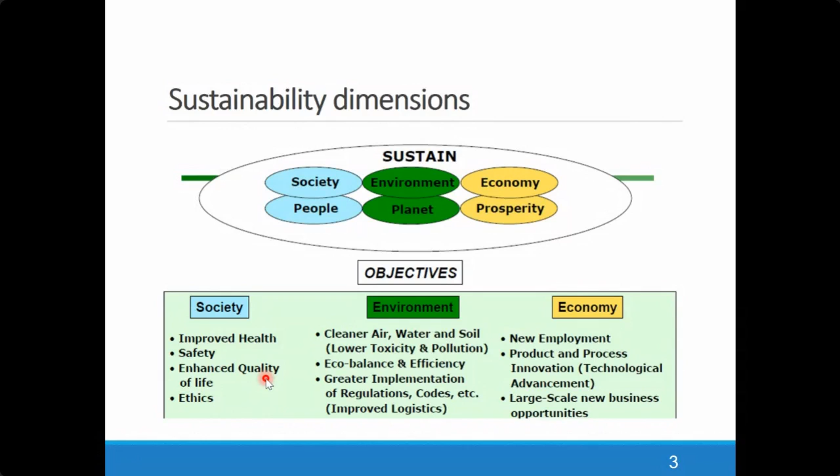Next, if you see the sustainability development, as we have seen, these triple dimensions are there in the center, like environment, economy, and society. Here the focus is on technology, how the technology has to be utilized as a part of it. So there is the prime aspect, technology, because we know pretty well in Industry 4.0 also, it is all about technological integration, like Internet of Things, cyber physical systems, additive manufacturing.

A lot of technologies need to be integrated. So in this, education and training for the workforce is very essential. And creative and innovative thinking is also very essential, because a lot of improvements we have to bring about. So in this direction, creative and innovative thinking is also very essential.

Above all, it focuses on the sustainable development. So the development has to be a sustained one as a part of it. That also needs to be focused.

If you see the various domains, this concept of sustainability and sustainable development is applicable in a variety of domains like agriculture, housing, transportation, architectural applications, constructional applications, energy-based applications, and so on. But here we will take from the domain of manufacturing, the sustainable manufacturing. So from a manufacturing background, we try to take the concept from the manufacturing perspective and explore it.

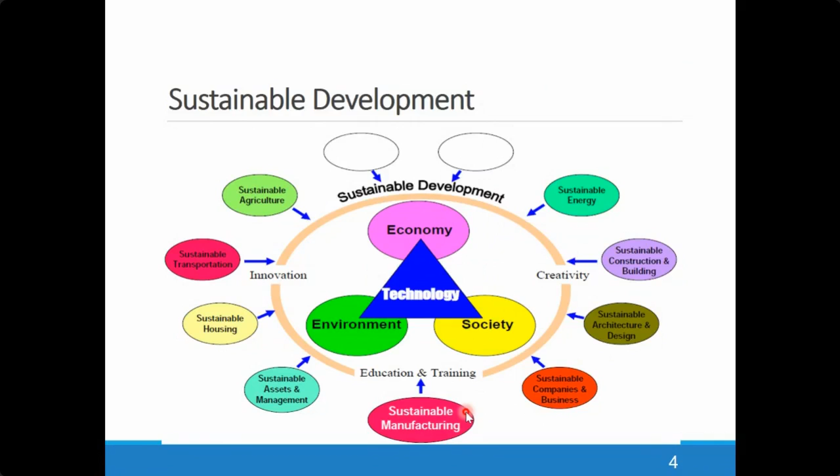So here in a nutshell, we understood the domains are increasing and the base is on technological utilization, and we need to have education and training and creative and innovative thinking. We have to promote this, because this innovation has to be brought about.

If you see some of the terms and definitions of sustainable manufacturing, it is called environmentally responsible manufacturing, because we need to have the responsibility to protect the planet. That's why it's called environmentally responsible. Then it is environmentally benign, that means environmentally inclined manufacturing. It is focused towards environmentally conscious manufacturing.

Then cleaner process, that's what we call green manufacturing. We reduce the utilization of resources, we explore reuse aspect, recycling aspect, and so on. Then again, it is called lean manufacturing, which is economically advantageous. That means how we have to produce to customer demand, how we can deal with waste minimization, how we can bring down inventory waste, how we can reduce waiting time, how we can reduce defects, and so on. So it's economically advantageous. Then energy efficient, because here we need to optimally utilize energy-based resources.

That is very essential. So energy efficiency is also very important. Next, exploring alternative sources of energy, like renewable sources and so on, because fossil fuels, the source is almost being depleted. So now we are exploring alternative sources of energy, which is more relevant. So these are nothing but the connected terms with sustainable manufacturing.

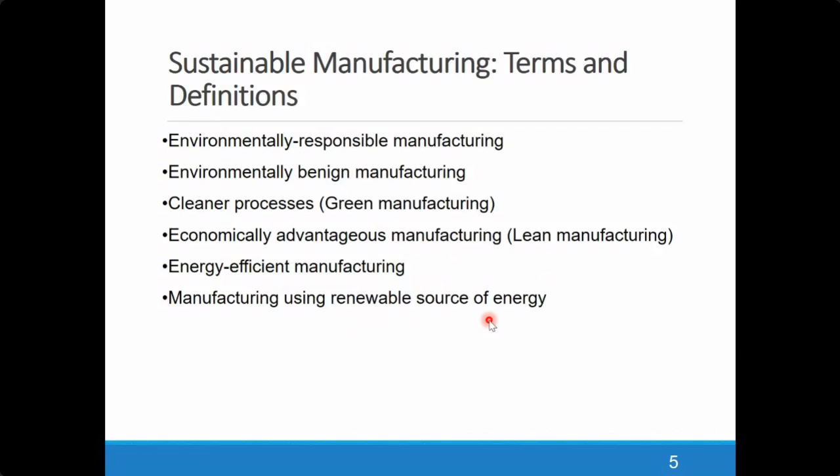Then if you see some of the basic elements of sustainable manufacturing, here we have the focus on reducing energy consumption. So always here we'll be doing an input-output analysis, because the relationship between inputs and outputs needs to be studied in order to improve system performance. Next, waste reduction, how we can bring down the waste, how we can minimize and eliminate waste.

So though lean is one of the prerequisites for a sustainable system, other forms of waste are also being taken care of, like how we can bring down the environmental waste and other aspects, how we can reduce material utilization so it is optimal, and how we can enhance product durability and lifetime.

Constantly industries are researching to enhance the durability of their products. Then how we can enhance operational safety, because now environment, health and safety are connected issues. That's why in industry context it is called EHS - environment, health and safety - how they are connected. That is also most essential.

Next, how we can reduce health hazards and enhance the health conditions of workers - that's again most essential. Next, quality improvement, because we know pretty well any advance in manufacturing systems obviously has its focus on improving manufacturing quality. How it can be focused upon.

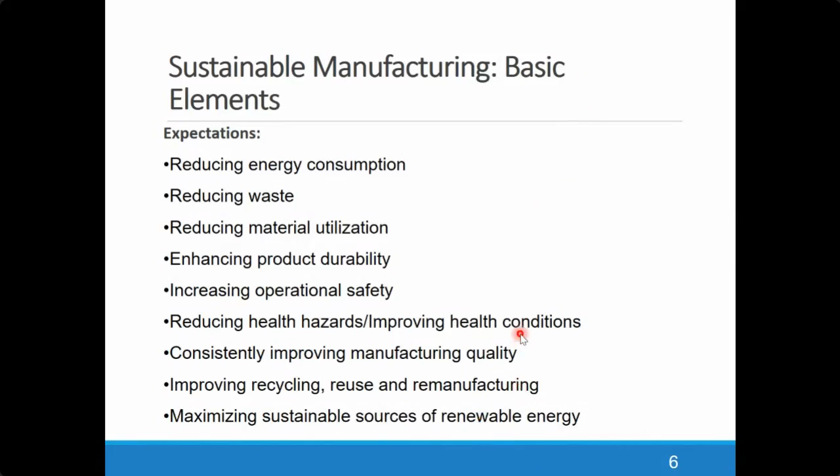Next, if we see, sustainable manufacturing is called paradigm E. That means it has its focus on ecology, protecting the planet, and has a responsibility to protect the environment, and how effectively we can utilize energy, and how it can provide economical benefits, employment opportunities, new learning opportunities, and the empowerment of people. Empowerment is very essential, because here innovation needs to happen.

Innovation will happen only when the workforce is allowed to think, when employees are allowed to think, and we have to empower them. So they have to do certain experimentation. They should have certain decision-making skills. So we have to empower them as a part of it.

Then we have to constantly educate them, because now industry's expectation is that their workforce or employees should have continuous learning potential. That is most important - whether they have that attitude for learning or not is very essential. Then excellence - how performance excellence can happen. So sustainable manufacturing incorporates all these entities which start with the alphabet E. That's why it's called paradigm E.

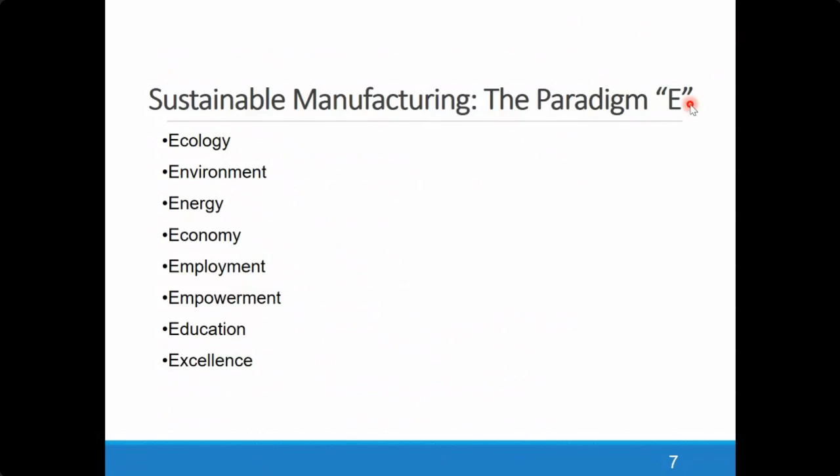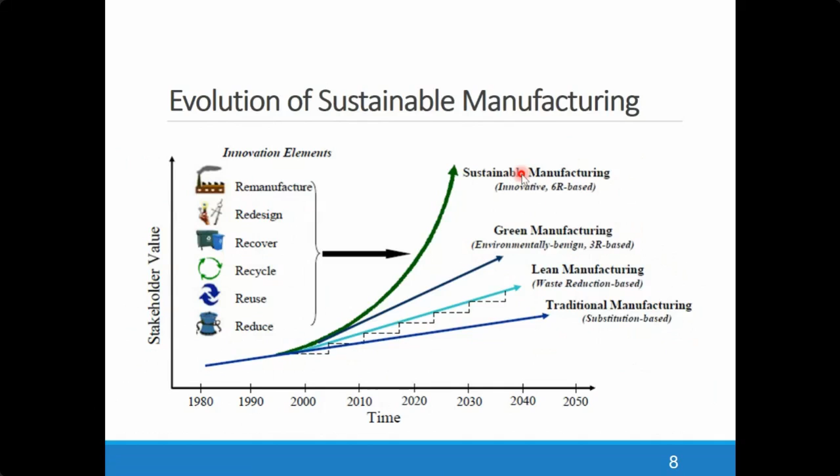So there is a difference between green and sustainable manufacturing, whereas green is 3R based, whereas sustainable is 6R based, and sustainable manufacturing is innovative, because here it is being incorporated with creative and innovative aspects as a part. This is how sustainable manufacturing has evolved over a period of time.

If we see, there are different tools for eco-efficient and sustainable manufacturing, starting from design for environment, eco-efficiency analysis, and life cycle assessment, which is one of the powerful tools. We'll be discussing this tool, which is used to find the environmental impacts of products and processes.

Then how procurement could be done, incorporated with sustainability aspects. Then life cycle costing, we shall have some discussion in this aspect. Then environmental impact assessment. Likewise, there are different tools. But from a product design and manufacturing perspective, we are very much concerned about design for environment, life cycle assessment, life cycle costing. These kinds of tools are very relevant from a manufacturing perspective, especially from a product design and manufacturing viewpoint.

Are there any queries till this stage? Always you can post in the chat box. Dr. Dinakaran, are there any queries as till this stage being posted in the chat box? Because I could not see the chat box. Dr. Dinakaran, are there any questions being posted in the chat box? Sir, please go ahead, sir. They will post their question at last. Okay, at the last. You can go on, sir. Fine.

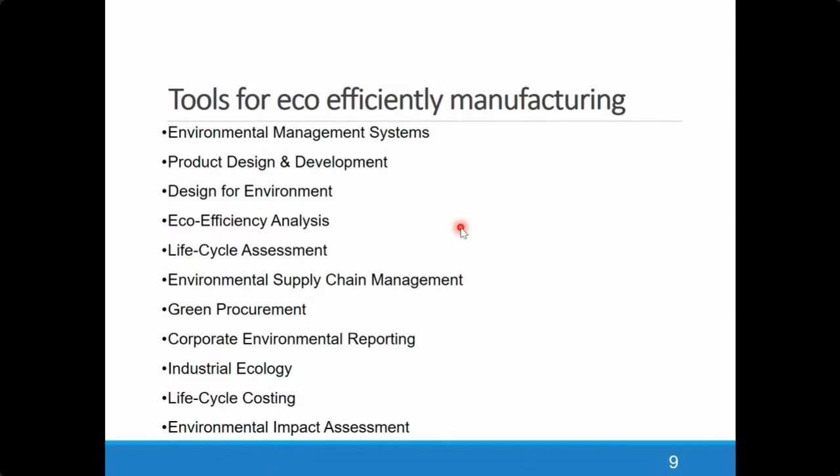Okay, now let us see, as I told, about the scope of design for environment and product design and development from an environmental aspect.

Now let us see the model for sustainable product development, wherein we have the traditional product development, which starts with customer requirements, and we move on with the design goals or design objectives. We design the products, manufacture, it's put into use, and finally it's disposed.

But when we take on the sustainability focus, we try to take into account the customer requirements and the environmental aspects, and we try to do a kind of quality function deployment based analysis to find out the kind of trade-offs or relationship between the customer requirements and the environmental aspects.

Then, after doing this kind of analysis of interrelationships and trade-offs, we try to go for a life cycle assessment based analysis and do a life cycle costing to find out which components have the potential for environmental impact reduction.

Because we can't say that in a product assembly all components will have the same kind of potential for environmental impact reduction. So definitely there will be a differential scope among the products for environmental impact minimization. So we need to explore the components which have potential for environmental impact minimization.

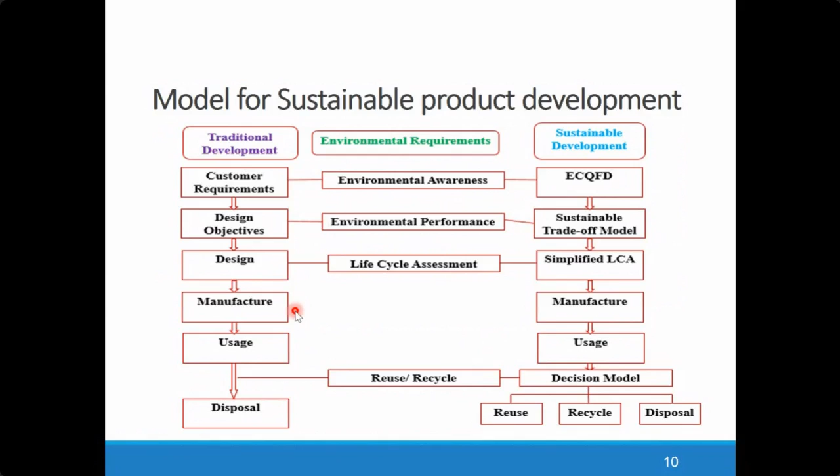Okay, so with this we shall proceed with the next tool, which is called life cycle assessment, one of the powerful tools used to find out the environmental impacts associated with products and processes. It is also called life cycle analysis, eco-balance analysis, or cradle to grave analysis.

So the term cradle means starting from material extraction. Grave means the product which is being disposed back to the environment. So here we'll be able to assess the environmental impacts associated with all stages of a product's life cycle, starting from material extraction.

Then we process the materials, manufacture, distribute, put into use, then repair, maintain, and dispose of the products. Likewise, we have different phases, and here the LCA has to be done based on the ISO standard as a part of it.

Here it facilitates the comparison of products and processes, and here we will take the life cycle perspective as a part of it. So that is more essential, and there will be different boundary systems as well as a part of it.

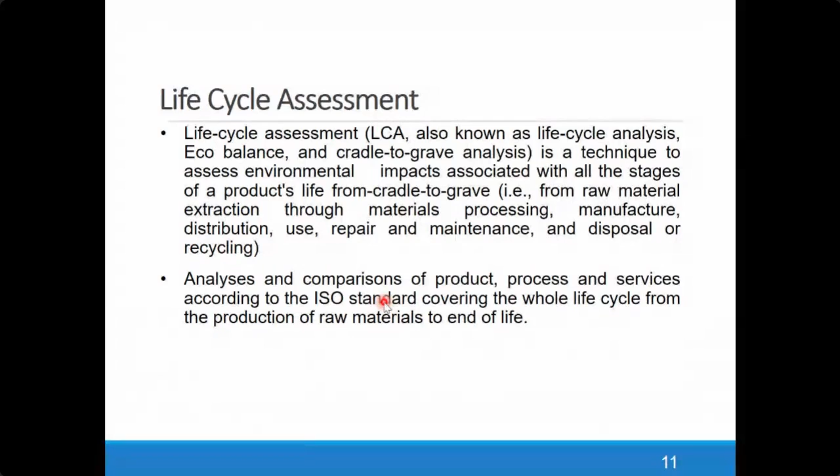For example, within a factory, the raw material has arrived and the product is being manufactured. Within this boundary we are doing what's called a gate-to-gate system, where starting from materials extraction up to the product being manufactured, it is called a cradle to gate cycle. So we have different boundary conditions.

In life cycle assessment, we should have a holistic approach for products, process, and activities. Here we start from acquiring materials, we manufacture them, we use and explore the end of life aspect, and here we'll be doing the reuse and recycling aspect, studying it as part of it. So we take a holistic aspect of products, process, and activities, giving us a holistic picture of the life cycle assessment.

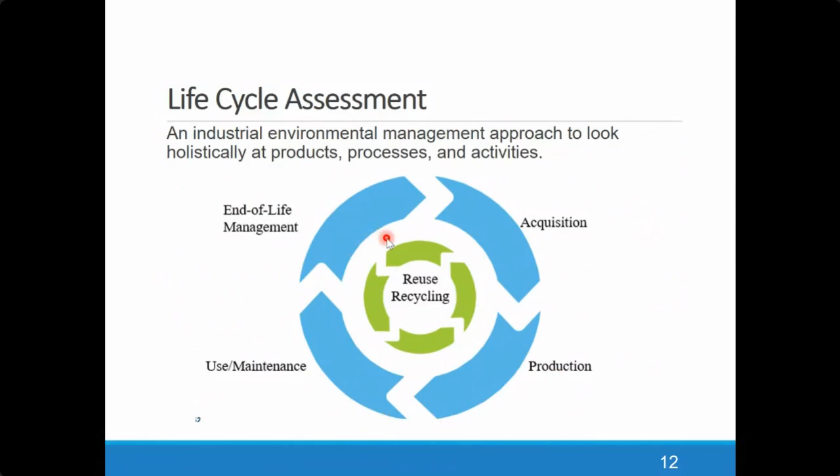There are different standards we may have to follow for doing LCA. We all know the ISO 14000 series is meant for the environment. 14040 contains the principles and framework for doing LCA, and 14044 contains the requirements and guidelines for doing LCA. This is a standard procedure to find the environmental impacts.

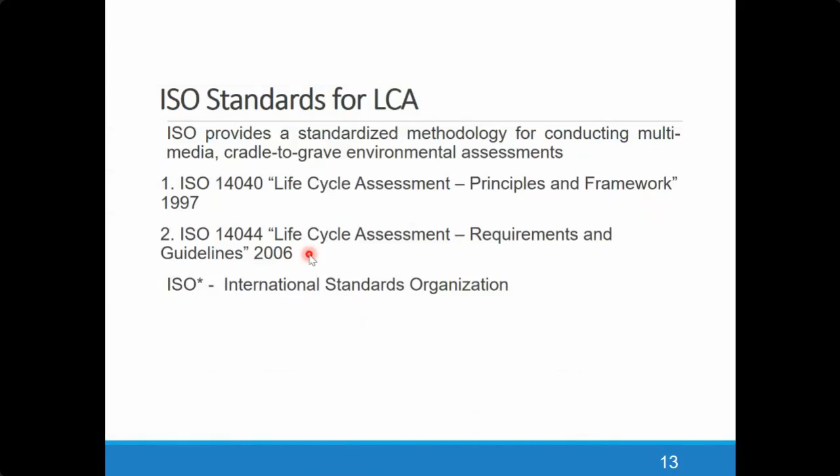We have to refer these standards because, for example, automotive component industries manufacture similar products like crankshafts or camshafts. They do LCA and want to compare their environmental impacts - what is the carbon-based emission during the manufacture phase - so they'll be able to benchmark as part of it. So there is significance in adopting standards.

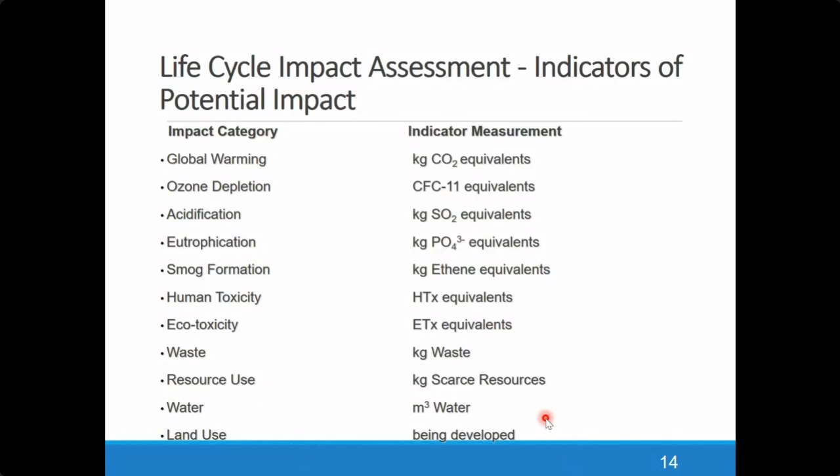There are different environmental indicators as part of it. Any LCA analysis can find about 16 impacts, but from a product design and manufacturing viewpoint, we are very much concerned about carbon-based emissions, sulfur-based emissions, phosphor-based emissions, and energy-based emissions. So these four impacts are very significant, and those indicators we are very much concerned about.

In goal and scope definition, we should spell out the objectives of doing LCA. Why are we doing LCA? Are we going to benchmark the products? Are we going to benchmark the process? Or is the customer asking? Or is a regulatory agency asking? We should be very clear about the objective of doing LCA.

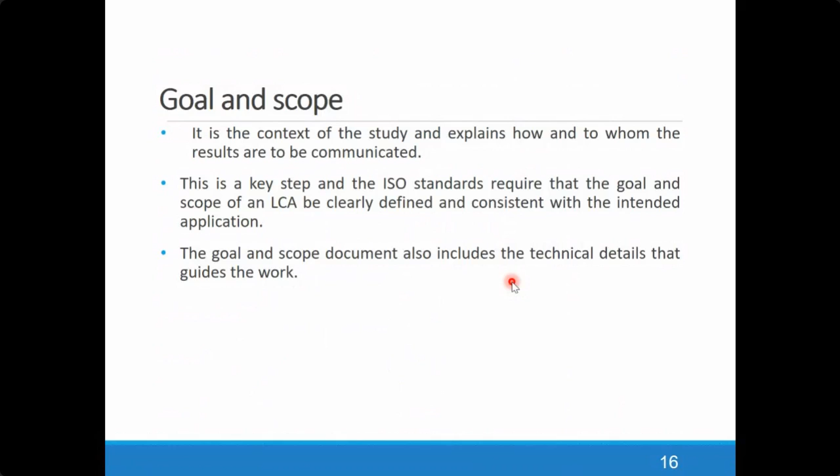We should discuss the scope, that means the boundary. Are we going to do a cradle to gate analysis or a gate to gate system? The boundaries need to be spelled out very clearly as part of it.

We should be familiar about the product function. This is nothing but the intended purpose of the product for which we do the environmental impact analysis. The product function needs to be defined very clearly, for which we take inputs from the functional model of a product, through which we understand the intended purpose of the product for which we perform the analysis.

When we are doing benchmarking, we have to compare only similar systems. Let's take a common example of a coffee grinder - the purpose is to grind coffee pellets. So we need to compare the LCA results of a coffee grinder with another coffee grinder. The systems adopted for comparison should be similar.

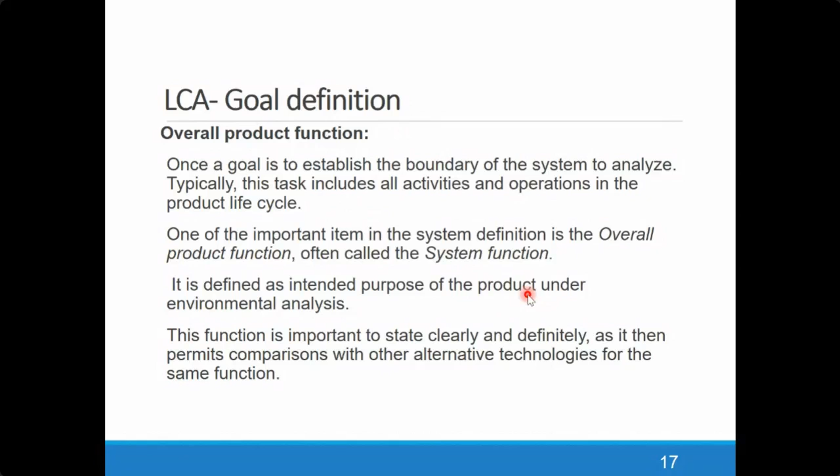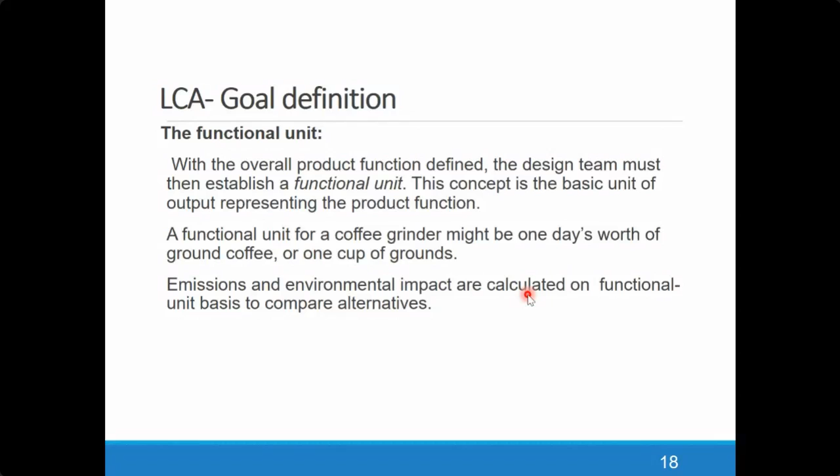A functional unit is nothing but, per hour, how much coffee pellets we are grinding, or per day, how much coffee pellets we are grinding. The functional unit is very important because all the emission and environmental impact data will be calculated based on the functional unit to compare alternatives. That is very much essential, so we should be very clear about the functional unit.

Then the next phase is the inventory analysis phase. Here we'll be creating the inventory flows from the system and to the system. What is the meaning of inventory? Traditionally, inventory is the stock of goods. But here, it means how much material is being consumed, how much energy is being consumed - that is the inventory data. For a process: what is the primary material consumption, the secondary material consumption, how much energy is fed to the process, how much is wasted, how much is transformed? We should have a clear understanding about the relationship between inputs and outputs - that is very essential.

So we try to create the inventory flows from nature - raw materials and energy being fed to the system. And from the system, the product, apart from the emissions and pollutants which are sent to nature. These inflows and outflows we have to clearly define, and we should create a flow diagram to understand the complete inventory flows.

We may have to do process modeling. Traditionally, we take a two-dimensional process model with inputs and outputs. But here we may have to do a three-dimensional process modeling, counting inputs, outputs, and impacts. That is very essential as part of inventory analysis.

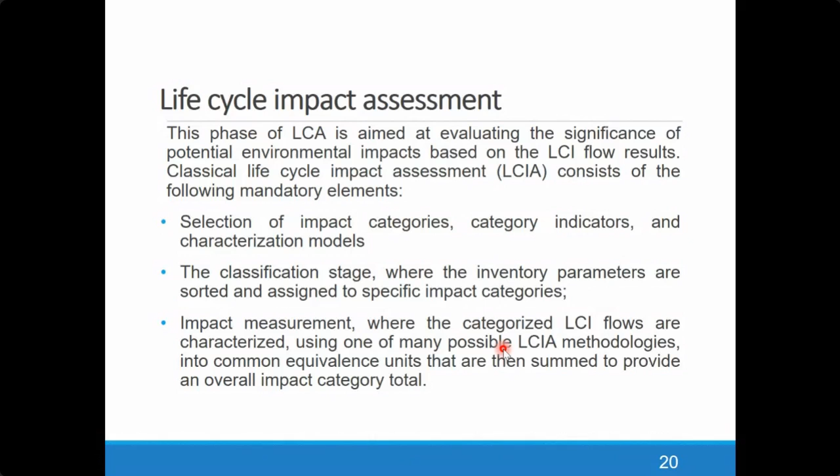This is about the impact assessment. Here we'll be able to find out the impacts by correlating the inventory data with the impacts, for which there are specific methodologies. In the Indian scenario, we follow the eco-indicator approach. From the European context, they follow the CML method. Impact assessment methods vary keeping in mind geographical conditions and other aspects. So we'll be following the eco-indicator method for impact assessment.

Next, the last phase is interpretation. Here we'll be finding out the conclusions and deriving inferences and recommendations from the study. We may do a completeness analysis, a sensitivity analysis, and derive the conclusions and inferences from the study.

How to reduce the environmental impacts? What are all the ways? Say we found the carbon-based emission is higher - how can it be brought down? Are we going to take some alternative material, or change some process, switching over to another process? We will do complete research and try to find out all the ways we can bring down the environmental impacts. That's what we'll be doing in the interpretation.

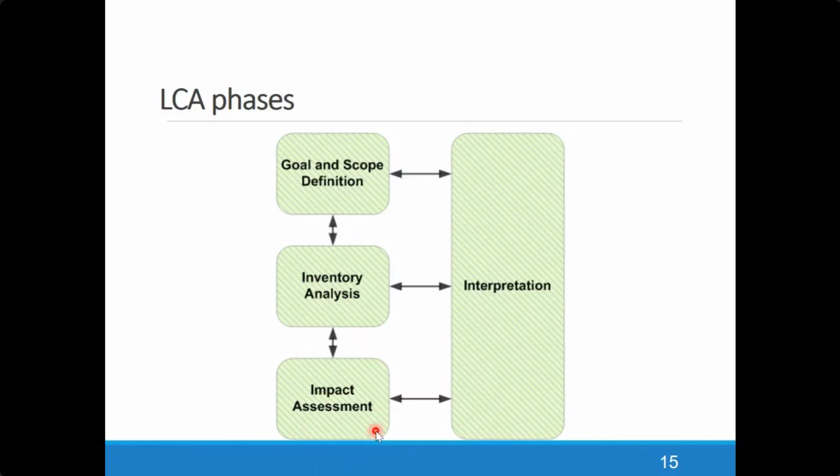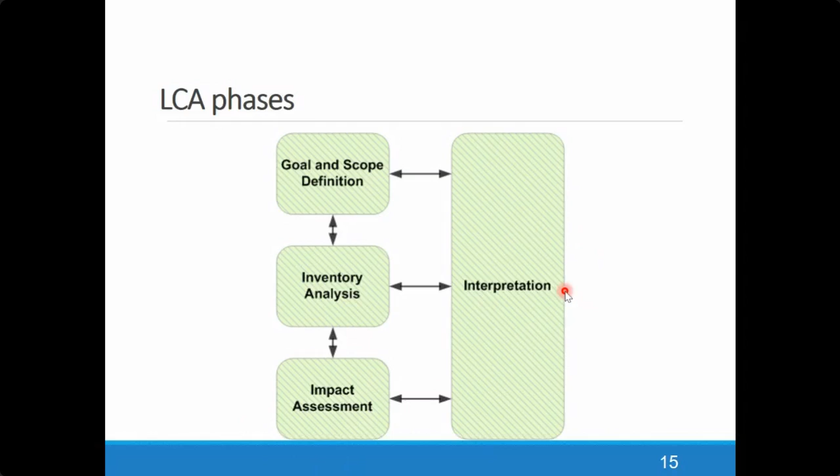So now we discussed the 4 phases. One is goal and scope definition - we understood the objective, the scope to be defined, the product function and the functional unit to be defined. Then we go ahead with the inventory analysis - we clearly find out the inventory data, create the inflows and outflows to the system, and do a complete flow analysis. Then we go ahead with the impact assessment, concerned about finding the impact categories and impact indicators relevant to us. Then we go ahead with the interpretation. This is about the 4 phases of doing an LCA.

And there are different software modules for performing the life cycle assessment. I'll be showing you a module through which we can perform the LCA.

If we see the benefits, we can find out the significant environmental impacts - which environmental impacts are vital - and explore the opportunities for minimizing them. We can promote the demand for products with lower environmental impact - now they say it's a green product, with eco-labeling and other concepts. So it promotes the demand for such products and compliance with regulations, and tries to integrate environmental management into decision making. These are all the various benefits of doing an LCA.

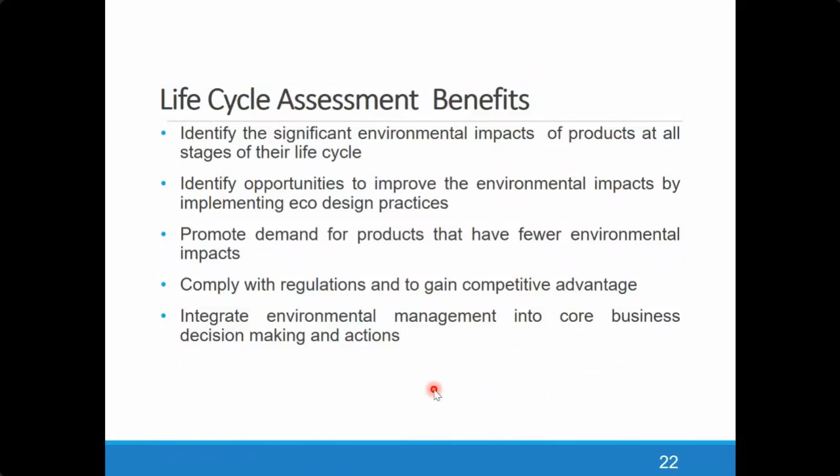So this is about the life cycle assessment. We will discuss the LCA module subsequently. One of the modules we will discuss today as part of it will give you some insight into how we do it. Now we discuss the theory, and we can see an illustration of how we do the LCA and how we derive the inferences from it.

Before that, let us go through the life cycle costing approach, which is also very essential from a product design perspective for sustainable manufacturing. In life cycle costing, it's a kind of numerical analysis we do, wherein we try to calculate the product gain of a product, which is the difference between the product value and the life cycle cost of the product.

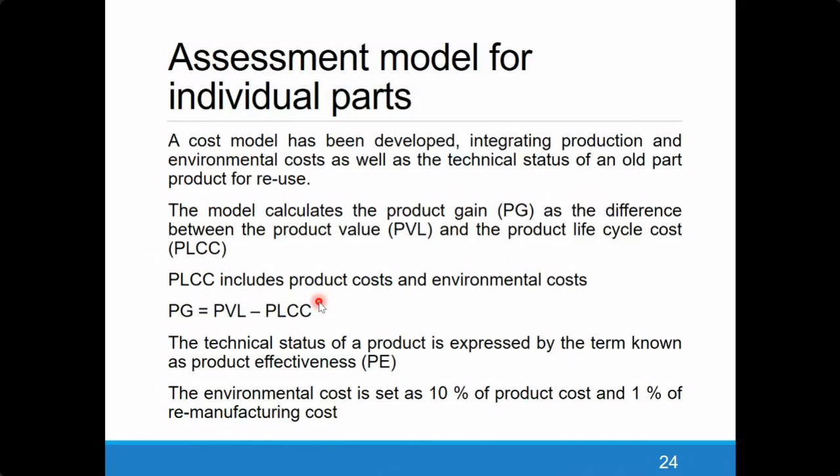Let us see an illustration to understand this. It is a kind of assessment model wherein we can see 2 scenarios: one is manufacturing a new component, and another is reverse manufacturing an old component. The product cost of different components is known to us. The environmental cost is normally 10% of product cost for forward manufacturing, as per the guidelines given in the literature.

And the life cycle cost is the sum of the product cost and environmental cost. Then we know the market price of individual components. The product effectiveness is a binary value: it takes 1 if it has scope for reduction of environmental impact, 0 otherwise. Product value is the product of market price and product effectiveness. Then we calculate the product gain, which is the difference between the product value and the product life cycle cost.

Next is reverse manufacturing an old component, wherein we have the procurement cost, where once the product lifetime is over, we have to procure it from the customer. This incurs some cost, called procurement cost, and the remanufacturing cost. We need to do certain reprocessing activities to bring the product to its extended life. So we incur certain remanufacturing cost. The environmental cost is normally 1% of remanufacturing cost as per the guidelines given in the literature, and the summation of these 3 is the life cycle cost.

Market price, product effectiveness, and product value calculation remain the same; the procedure remains the same. The product gain is the difference between the product value and the life cycle cost. So here we'll have 2 product gains: one for manufacturing a new component, another for reverse manufacturing the old component. We need to calculate delta product gain, delta PG, which is the difference between the product gain for reverse manufacturing the old component and that of the new component. That difference is the net product gain, delta PG.

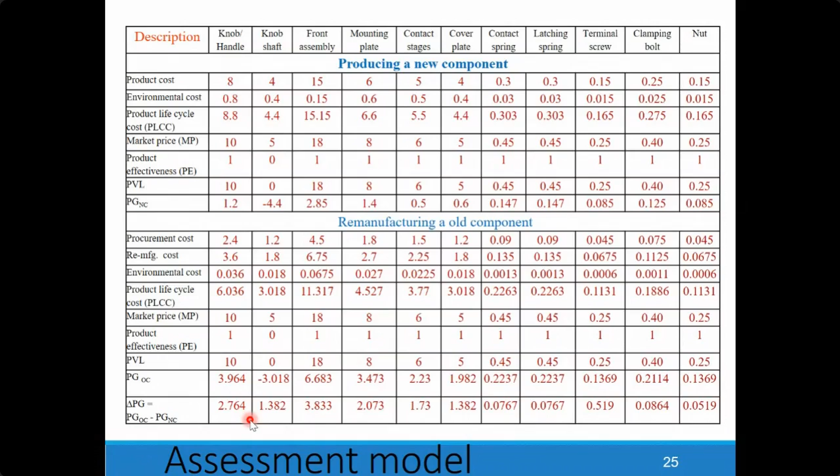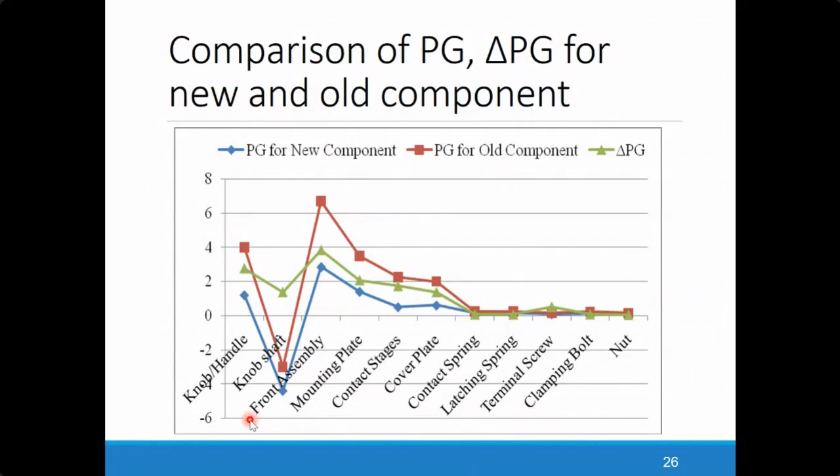That is, from different components in the product assembly, we can find out which component has potential for environmental impact minimization. So we shall focus on those components because they are very good candidates for bringing down the environmental impact. This kind of differentiation is needed because we can't say that all components in the product assembly will have similar potential for reverse design and reverse manufacturing. It's not so.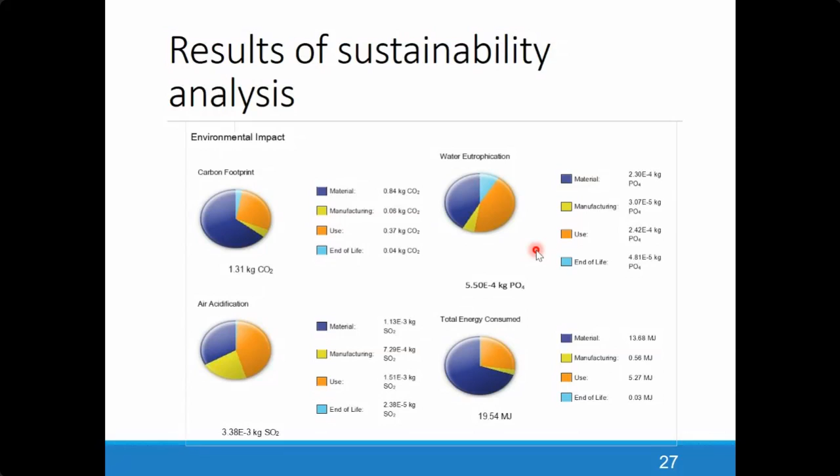Next, I'll tell you about a sustainability analysis module, with subsequent details. So here we have identified the components for environmental impact minimization. Then we may have to test what is the reduction in the environmental impact, for which we will go ahead with the sustainability analysis module. Through this module, we'll find out the environmental impacts across the life cycle perspective, which I will discuss subsequently.

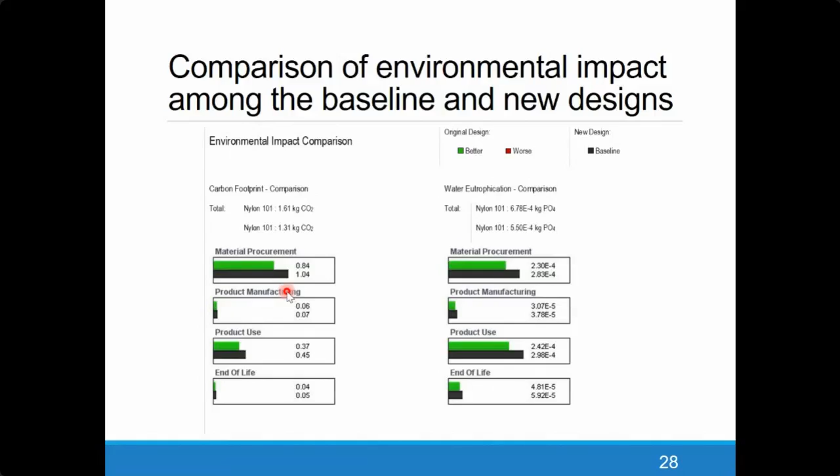Okay, so anyway, I'll be discussing the sustainability analysis module subsequently along with the LCA module. Here we understood that the components from life cycle costing will indicate which components have good potential for environmental impact minimization.

With this, we shall proceed with a discussion on the 3 R's and 6 R's of sustainable manufacturing. As I told in green manufacturing, the focus is on 3 R's: reduction of usage of resources, reusing, and recyclability. The 6 R's add recovery, redesign, and remanufacturing. So a sustainable product is having the focus on 6 R's.

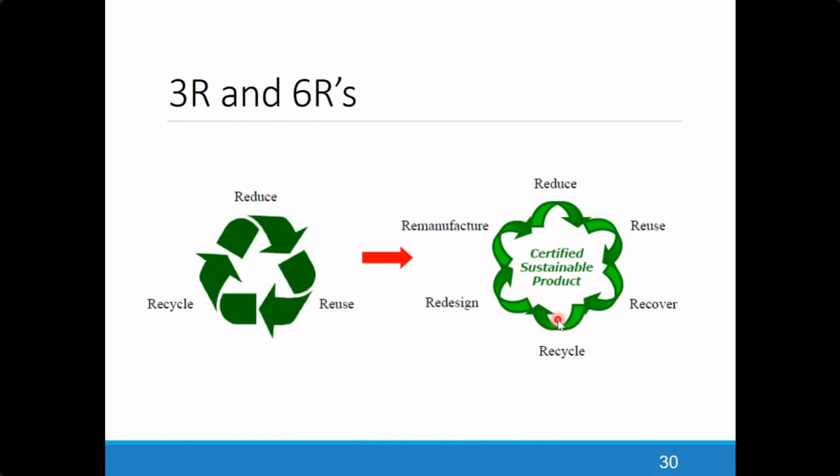After the useful lifetime, we have good potential for recovering the product and subsequently recycling, redesigning, and remanufacturing. Likewise, we can explore the 6 R's as part of it. So these 3 R's and 6 R's are very, very essential.

From this analysis, we can find out the components having good scope for reuse and recycling. Even in the additive manufacturing context, I pointed out how we are recycling, how the scope for recyclability of powders is being brought, and how dealing with the support structures is also being ensured.

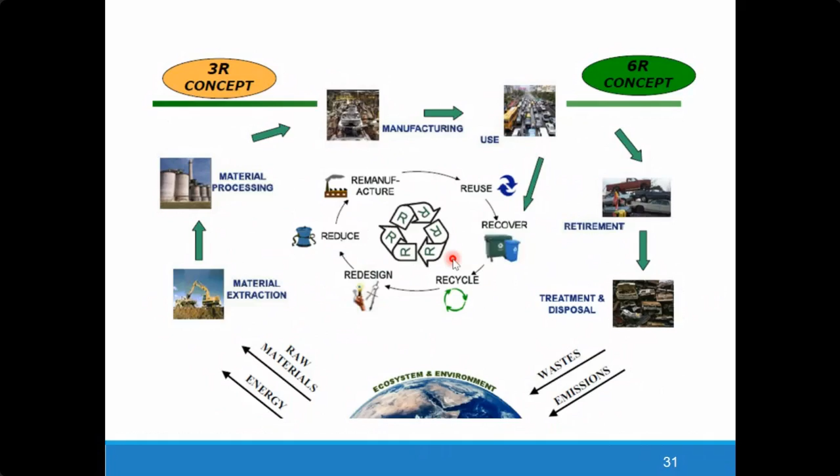It's being put into use, and post-use we'll be exploring recovery, redesign, and remanufacturing - the 3 other R's associated with sustainability. If the recovered material quality and yield is good, we take it ahead; otherwise it becomes landfill. The idea is that the landfill should be minimal, so we have to explore the reuse and recyclability of the materials.

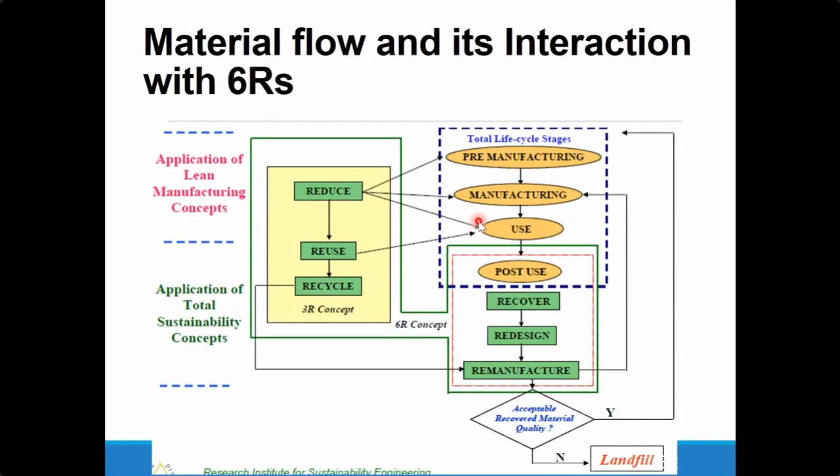So now we had a discussion on the 3 R's and 6 R's of sustainable manufacturing. Next, we will go ahead with the energy efficiency analysis of the manufacturing process, how it has to be done.

For example, as I told, we may have to do a kind of process modeling, which is very, very essential. Any typical manufacturing process model will have inputs in terms of material related input, product geometry information, and so on. On the output side, we have the product, waste and emissions, along with certain energy inputs, waste heat and other aspects.

The idea is that the relationship between inputs and outputs is very essential, and we may have to optimally utilize the input resources, thereby the output will be the desirable product, with waste and emissions minimized. But from a sustainability aspect, the energy models need to be 3-dimensional, where we have the inputs, outputs, and corresponding impacts. This relationship needs to be studied and analyzed, for which we may have different levels of energy efficiency assessment.

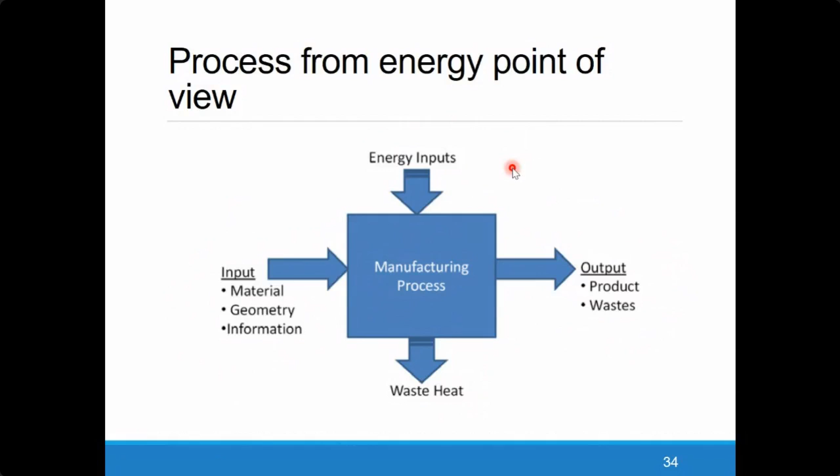First, we go ahead with the process level, where we study the energy related aspects and energy losses. Then we move to the machine level, which has several processes. From machine level, we move to the line level, wherein we have different machineries and equipment. Then from line level, we move to the factory level, wherein we have different product lines. So these are the different levels of energy efficiency assessment: process, machine, line, and factory level.

Now as I told, we'll be discussing about 2 modules. One is a product-based life cycle analysis, and another one is a process-based life cycle assessment module. We'll also discuss the sustainability analysis module, wherein we'll be finding about the 4 impact parameters.

From product design and manufacturing, we are concerned about the carbon emissions, which is called carbon footprint. Second is the phosphor based emissions, which is called the eutrophication indicator. Another one is the sulfur based emission, called the acidification indicator. And the last one is the energy being consumed, which is the energy related impact. So these 4 impact indicators will be of interest.

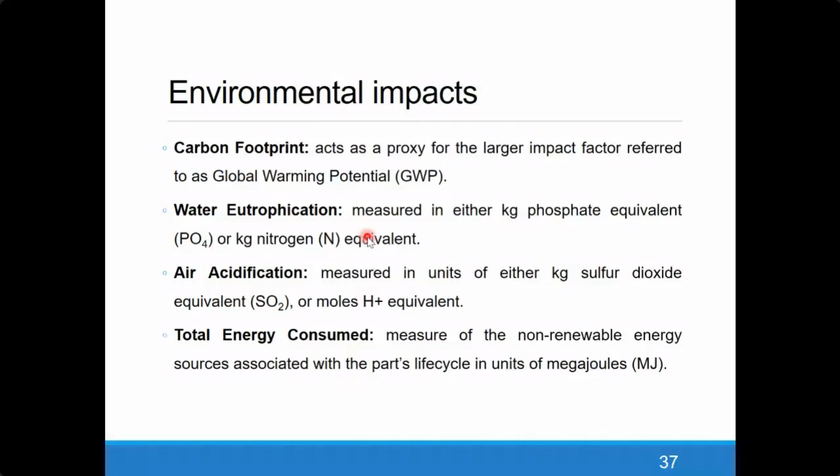This kind of sustainability analysis module is available with certain CAD based tools like SolidWorks and other modules, wherein once we develop a CAD model, we'll be able to specify the material, the manufacturing process, and spell out the manufacturer location and user location, because the impact assessment methods may vary as a part of it.

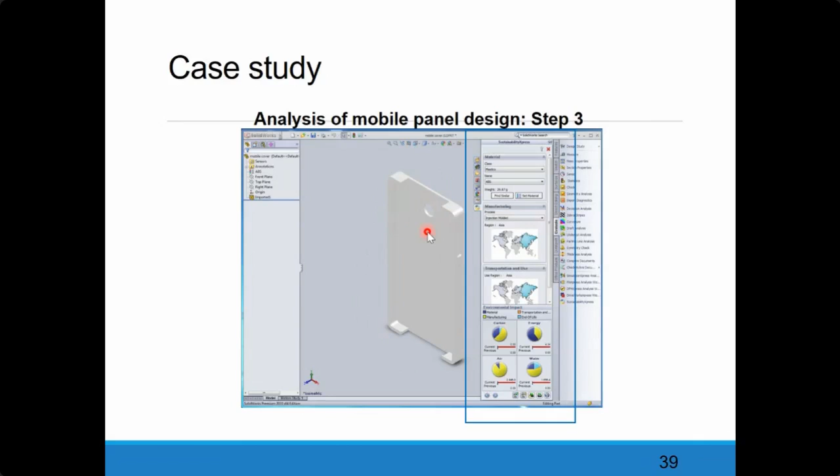Once we make the CAD data available, which includes the complete geometrical information of the product, and once we specify the material, manufacturing process, manufacturer, and user location, then the module will calculate the environmental impacts in 4 categories, like carbon based, phosphor based, nitrous based, and energy based impacts.

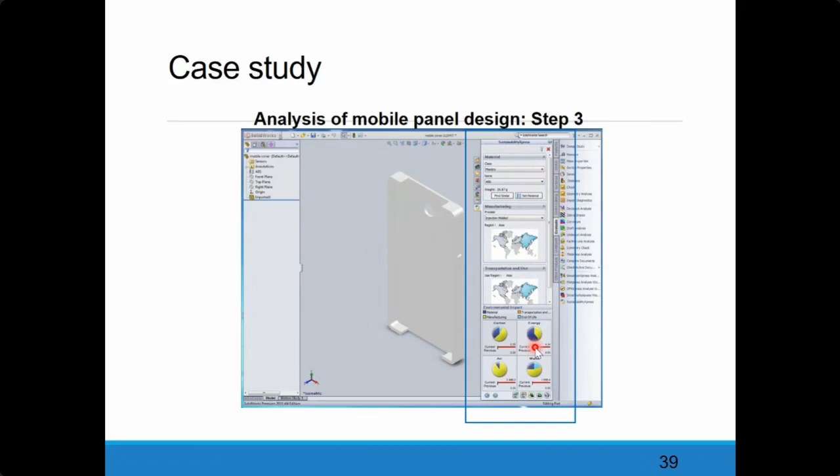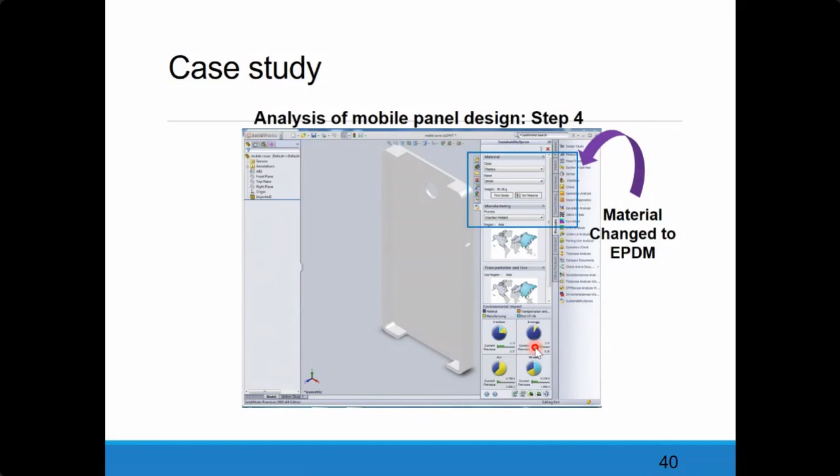Here we can explore what kind of effect changing the material can bring, or changing the design, or changing the process. All these iterations are possible as a part of it.

So at the elementary level, it will calculate the 4 types of impacts across their life cycle aspect, like materials, manufacturing, use, and end of life, and so on. Then we'll be able to benchmark the designs.

So this kind of product-based life cycle analysis will help us as a part of it. It even has very good relevance in the context of additive manufacturing, where we are exploring, even maybe in polymer-based printing, different materials which may have lesser environmental impact, and so on.

Or I want to benchmark maybe an existing process like injection molding with a 3D printing process based on FDM. I need to compare their environmental impacts, so it has good relevance even in additive manufacturing context, and we need certain studies as well.

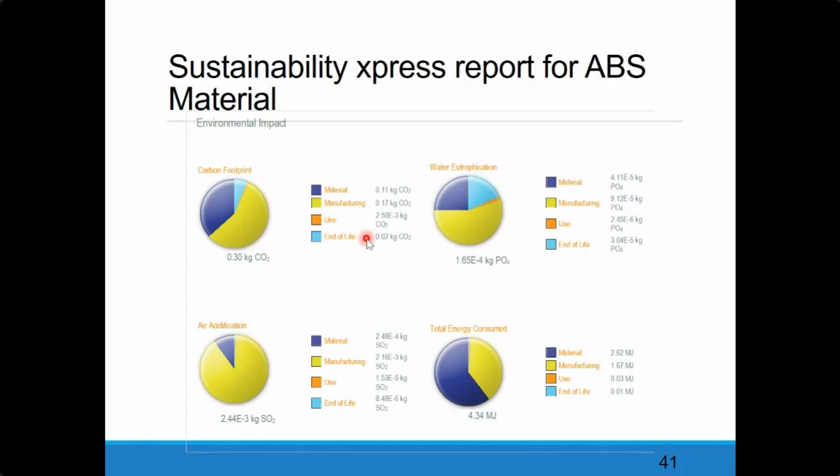The second module which I want to show you is a kind of LCA module, which is called the SIMAPRO module. This module is to facilitate the data collection, analysis, and it helps the monitoring of the sustainability performance.

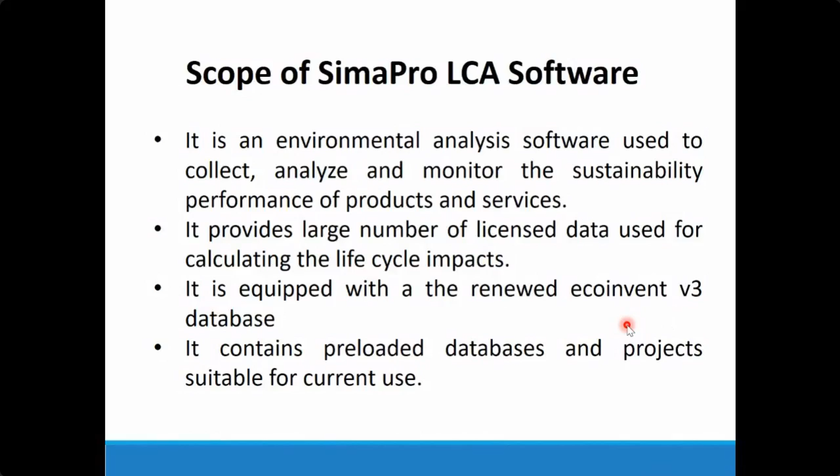It has been incorporated with the EcoInvent database, and this database will have all data associated with the materials and the process. This is the kind of interface we could see in the SIMAPRO module.

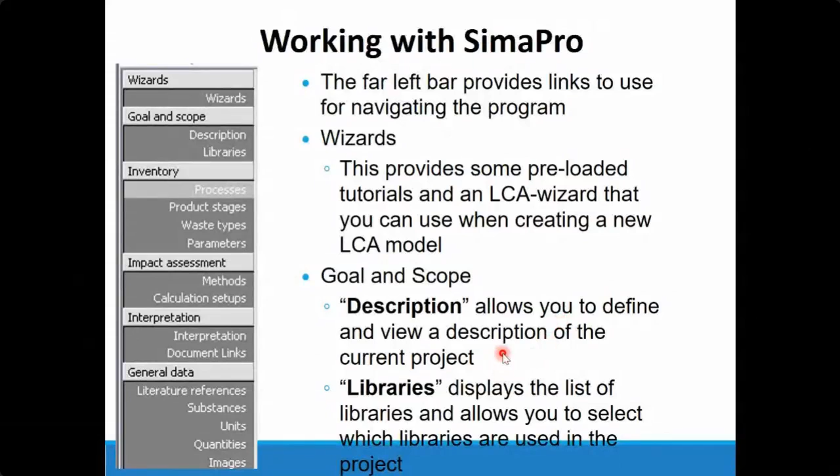It is as per the 4 phases of the life cycle assessment, like goal and scope definition, inventory analysis, impact assessment, and interpretation. It has predefined wizards, and here we'll be able to provide a description of the project, what the project is about, and it has certain predefined libraries and so on.

Wherein it has different materials and other aspects, and then the process tab will help you specify the process or the selective process involved, and the product stages where we can define the different life cycle phases and so on. It also has provision for defining different types of waste, and here we'll be able to spell out the various parameters being considered in the LCA.

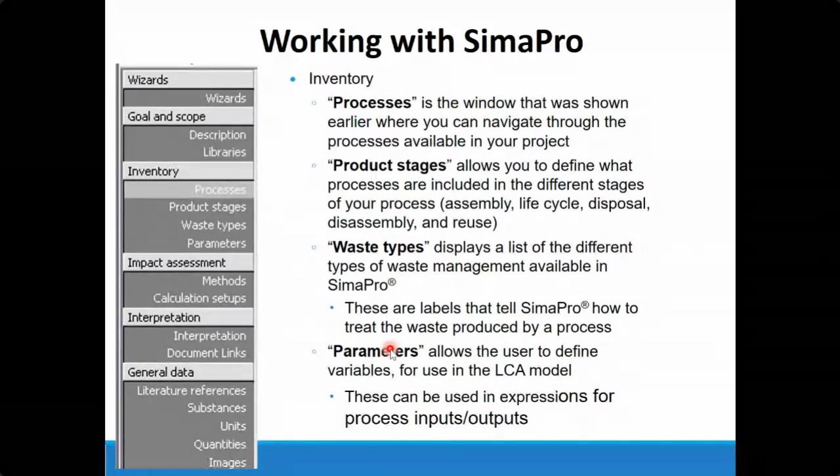Here the module again does a kind of relationship analysis between the inputs and outputs, and we may have to spell out the environmental impact assessment method.

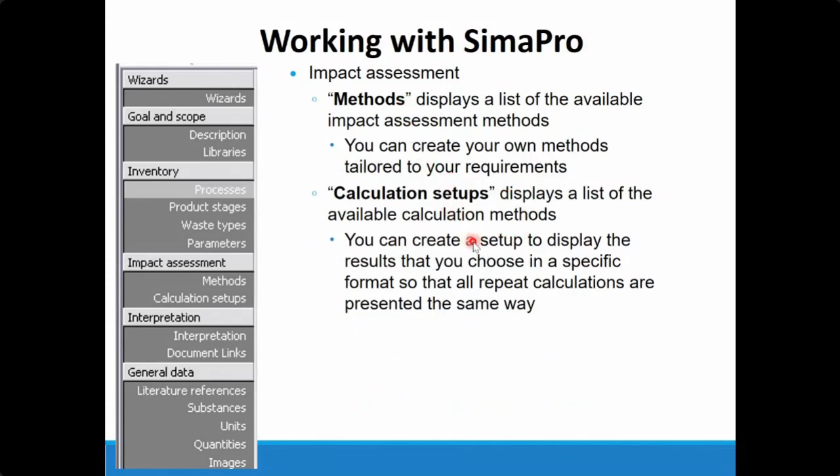As I told, we'll be using like a CML or eco indicator method and so on, and then we may have to go ahead with the computation, and it will derive the computations, and further we may have to infer, and the interpretation needs to be derived.

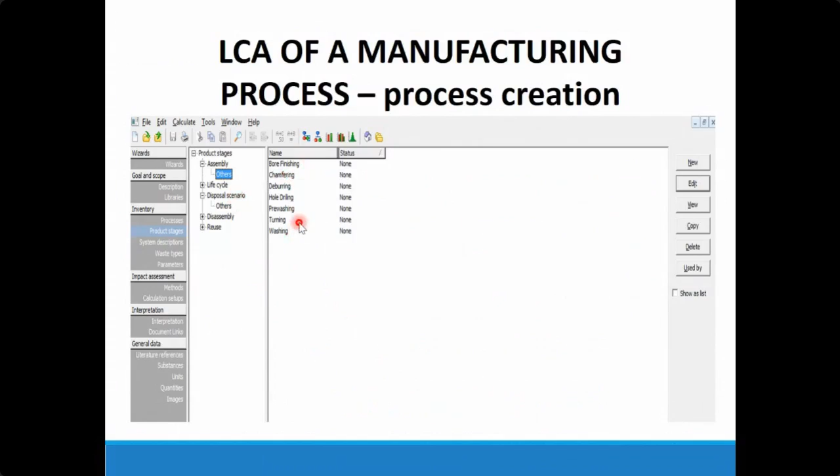If you see, this is the kind of interface of this LCA module, wherein we could specify the product and the corresponding process involved in the manufacturing. We have to spell out the inventory data, that is in terms of materials consumption, energy consumption, and so on, then we may have to spell out the impact assessment method, the eco indicator.

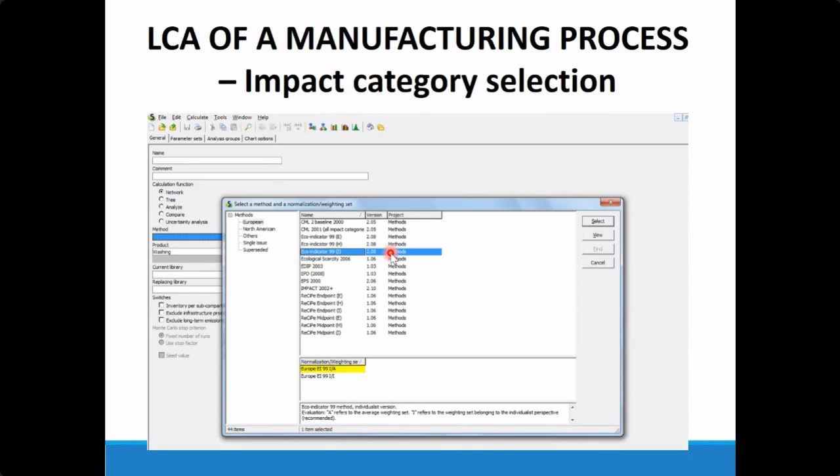In that we have 3 different approaches, and normally we try to go with the individualistic type approach, the eco indicator 99 approach. Once we spell out the method, it will calculate the environmental impact for different processes.

It calculates the impacts in 3 categories. One is the red bar, which shows the health-based impact, the green one represents the ecosystem-based impact, and the yellow one represents the resource-based impacts.

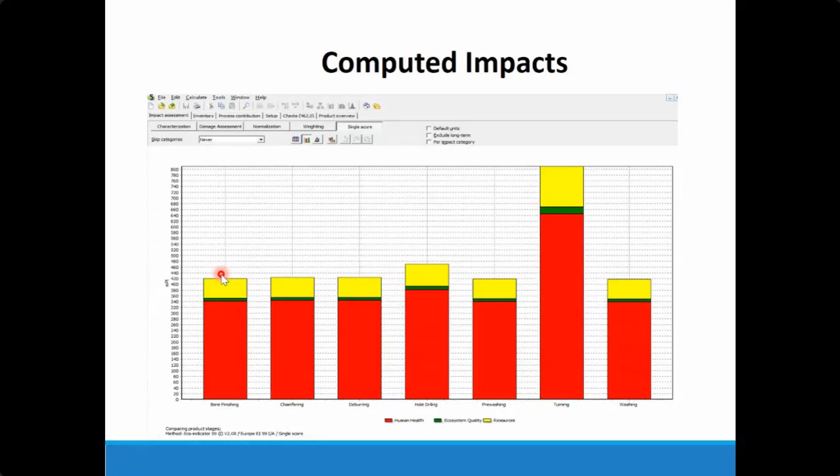So here we'll be able to infer which kind of impact category we may have to focus on - is it health-based or ecosystem-based and so on. This module will also help calculate the environmental impact as a single score, following the weighted normalization procedure, and we'll be able to benchmark different products based on this environmental impact score.

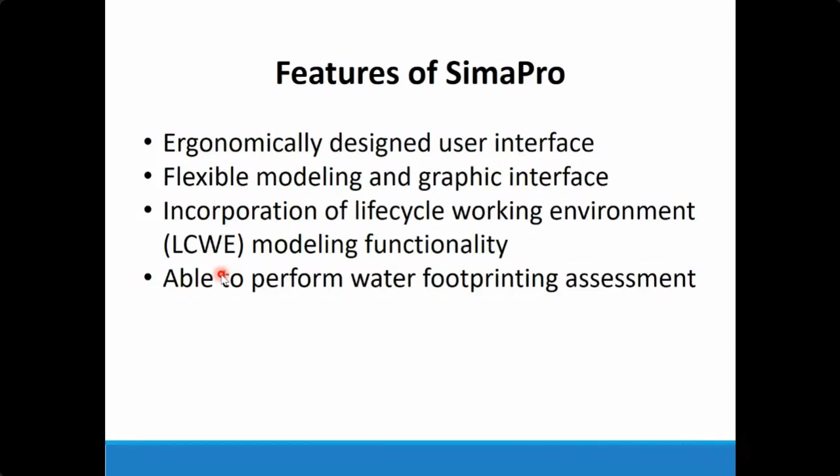The interface is designed well and incorporates flexible modeling. It has good scope for air footprint and water footprint analysis. Environmental engineers may be interested in this, and it's a widely used module for doing life cycle assessment.

Now we had a certain discussion on sustainability concepts, starting from the triple bottom line approach and the 3 dimensions, and we discussed the theory, tools, and objectives of sustainable manufacturing. Different approaches - we discussed methods like product design for environment and life cycle assessment, different phases, life cycle costing, the 3Rs and 6R concepts, and energy efficiency analysis.

Then we discussed about the 2 modules - one is the product-based LCA module and the other the process-based LCA module. I also mentioned insights with regard to additive manufacturing wherever possible, but now we shall have some more discussions in this regard.

As I told, in additive manufacturing, research is going on to make it more sustainable. Normally the environmental impacts in additive manufacturing we take ahead in three perspectives: resource consumption, waste management, and pollution control. In additive manufacturing, resource consumption - primarily energy and material consumption - is very important.

The energy is being consumed by the main equipment as well as the auxiliary subsystems. And here we will be having certain primary materials, secondary materials like support structures, and other auxiliary materials as well.

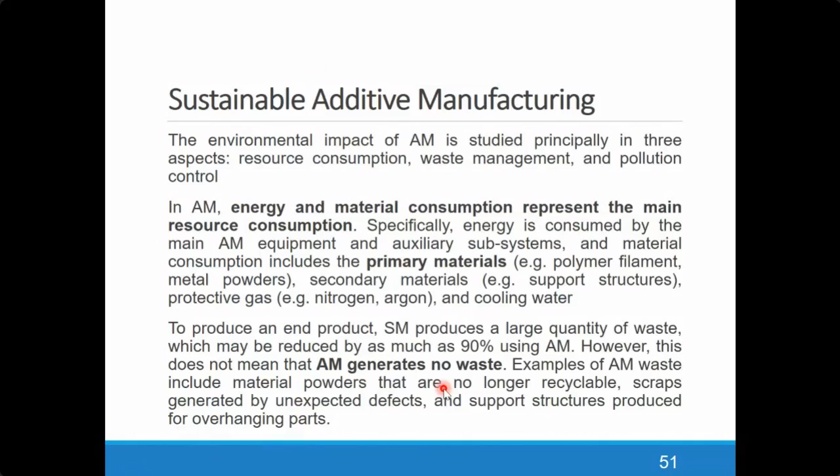Or maybe the kind of support structures for overhang parts - certain provisions are also being explored for how to take care of the support structures, and some of the scraps which may come because of certain defective parts and so on. So there is certain waste associated with the additive manufacturing process, but possible efforts are being taken to minimize them.

And the kind of toxic and harmful effects, compared to subtractive manufacturing - in additive manufacturing such aspects are minimal, because in subtractive approaches we take into account the cutting fluids, lubricants, and other aspects as well.

But here we may be exploring the environmental impacts during the use phase and disposal aspects as well. So definitely there are certain optimization approaches which will help us in this direction, especially to optimize the printing path as well as the support structures for material reduction and so on. Life cycle assessment and those kinds of analysis are also being done.

The research is being done from materials, products, and process perspectives on how to bring about sustainability aspects with regard to additive manufacturing. So it's more interesting and more relevant to take ahead the sustainable manufacturing concepts in the context of additive manufacturing. That's why I had my discussion on the sustainability aspects, the concepts, theories, and its relevance for additive manufacturing.

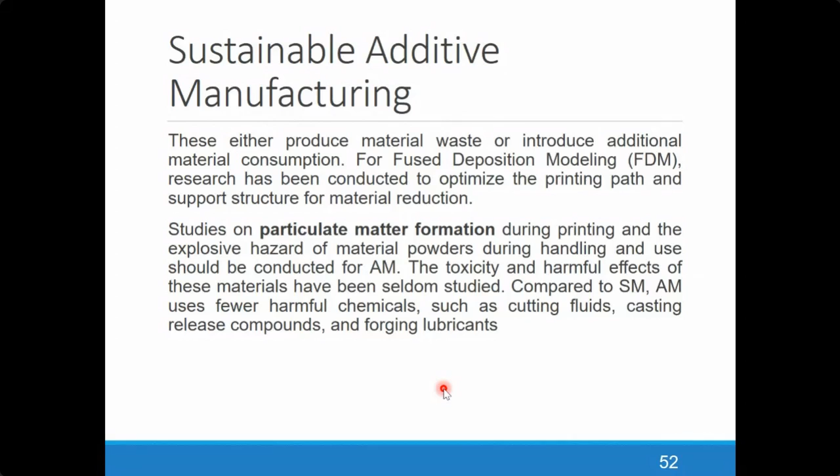Now let us move on with certain discussions on smart manufacturing.

So are there any queries, Dr. Dinakaran, being posted in the chat box?

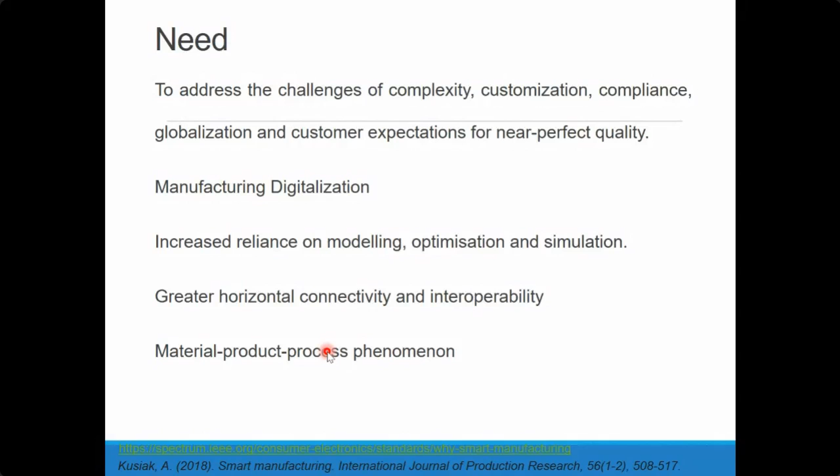For a definition of smart manufacturing, I'd like to discuss one that is widely cited, given by NIST, the National Institute of Standards and Technology, US, which states that it's a completely integrated system. It integrates several entities and is collaborative, with different types of collaboration between human and computer, human and robotic systems, and between several divisions and stakeholders.

It has to respond in real time to meet changing demands and changing factory conditions in the supply network, as well as fulfilling customer needs. Ultimately, the system is focused toward developing a smart factory that has to respond with flexibility, be adaptive and versatile, and it has to be incorporated with intelligent aspects of the product and process. That's very essential.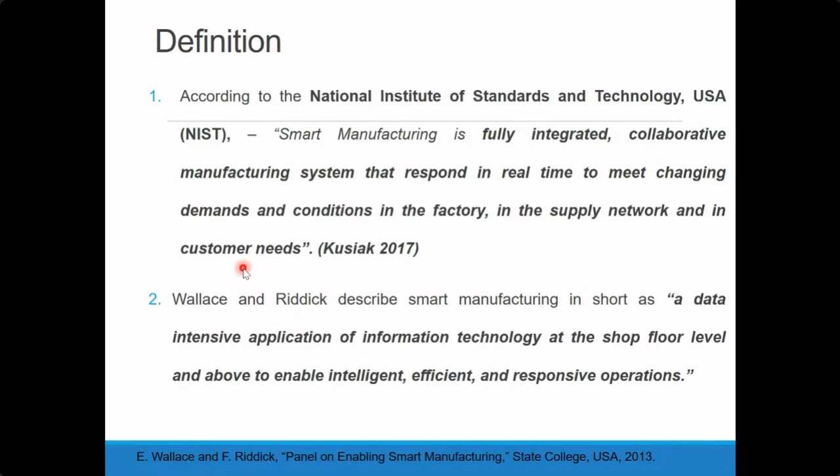There are several ground principles for developing a smart factory, starting from modularity and interoperability, and being able to facilitate intelligent control. Production has to be decentralized because centralized production may not always be helpful. We may have to take into account serviceability aspects, for which IoS helps us, utilize advanced modeling and simulation, ensure horizontal connectivity, and facilitate resource sharing. These are certain principles governing the system.

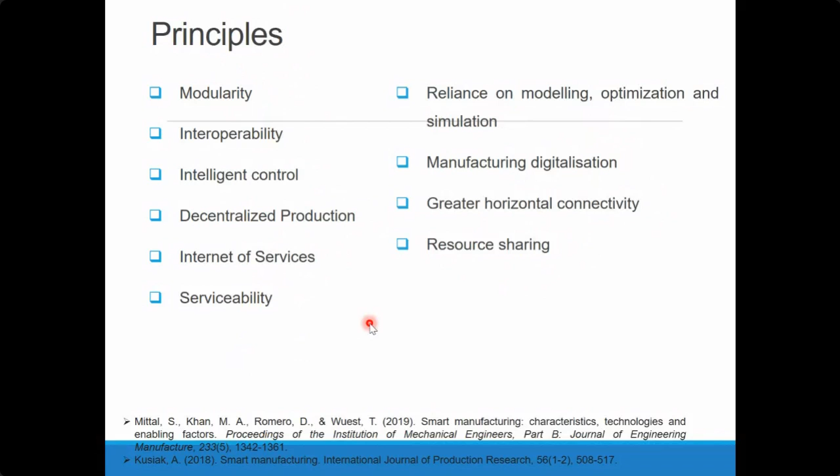Interoperability is also very essential because the cyber physical system, CPS, is the foundation through which it tries to connect the physical world to the digital world. The digital twin needs to be taken care of as part of this, which is more essential. Now let's look at some key technologies for smart manufacturing.

It goes by manufacturing-led design, because here many of the manufacturing aspects and complexities need to be forecasted during the design phase. Thereby, the design has to be made manufacturable, and ultimately the design has to facilitate manufacturing. So coordination is very essential as part of this.

Next one is nothing but 3D printing, which we are all familiar with in the third revolution. We utilize 3D printing, though in most cases we apply polymer-based printing, but metal-based printing is also under development as a part of it. Here we need to take into account manufacturing economics, and we may have to facilitate cost-effective technology. That's where the challenge lies, because from 3D printing now we are moving towards 4D printing, where time is an additional parameter as a part of it.

If you could see the evolution of these printers, somewhere they started with a 2D printer, which can print text in 2 dimensions. Next, they moved to the 3D printer, which can print objects in 3 dimensions. Next, the technology is about 4D printing, where after printing, the parts will get self-aligned and they will get assembled on their own as a part of it.

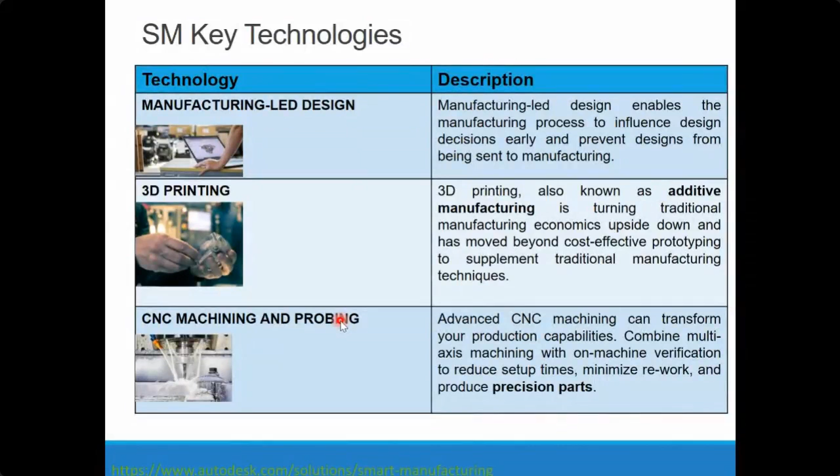Next, about CNC machining as a part of it, because now we are going on with integrated technology, wherein we may have to focus on higher precise manufacturing, and the production capabilities need to be enhanced as a part of it. And even we are going ahead with kinds of hybrid manufacturing and so on.

In hybrid manufacturing, some of the examples we could see is that even with subtractive technology, metal additive manufacturing is being combined as a part of it. Thereby, on the same machine, we are able to produce parts very faster with lesser waste and so on. So hybrid manufacturing is also another interesting application as a part. Even certain technologies are being brought in from friction-based processes and so on.

Next, about simulation. Here we are going for advanced simulation, taking into account the process dynamics, and we may have to try to understand the physics and dynamics of the process, and we may have to do the simulation. That simulation results will help us to enhance the process performance.

Next, about automation. Here, the robotic systems are very, very essential, because in certain situations, the robotic systems have to work autonomously on their own. And in most certain applications, they may have to do the coordinating role. The human-robot coordination is also very essential as a part of it.

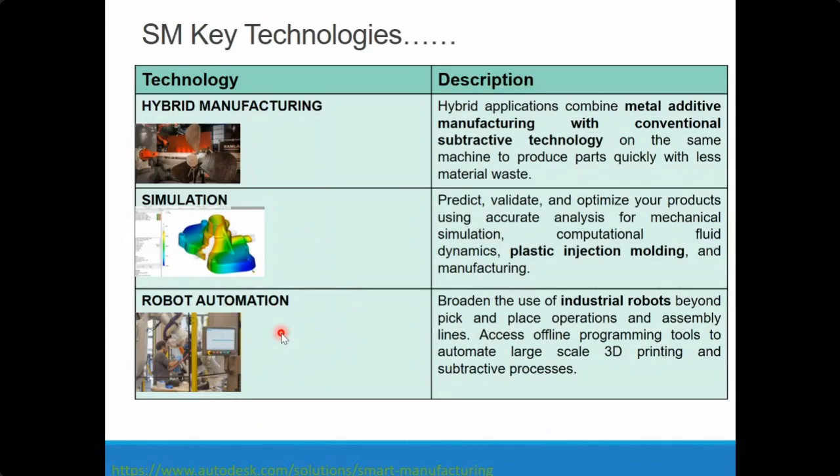Then about the cyber-physical production systems, called CPPS, because it has certain autonomous and cooperative elements that have connectivity across different levels, and it has to be integrated with the production and logistics network. How this kind of connectivity is being ensured is more interesting as a part of it. That's about the cyber physical production system. The same CPS concept we are extending to cyber physical production systems.

Next, about the industrial Internet of Things, industrial IoT, where we are trying to ensure interconnectivity between the machineries, and we are taking into account the logistics operations and other aspects.

Next, about big data analytics, because if you see, data analytics is very, very essential. Even in Industry 2.0 we had it, 3.0 we had it, but the data volume is higher and the data types are larger in number. Here we may have to analyze the data, and we may have to derive meaningful information as a part of it. That's most essential from the perspective of big data analytics.

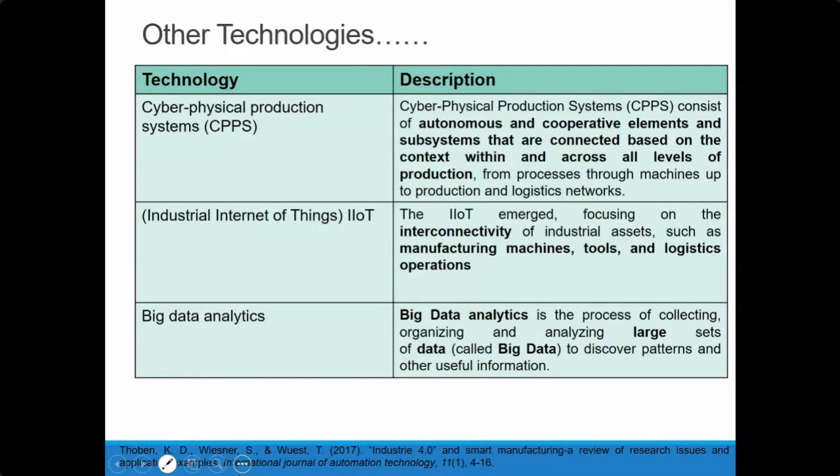Next one is artificial intelligence, because here a very important aspect is that we may have to program and incorporate, we may have to mimic human intelligence with regard to machineries and equipment. And accordingly, we need to enhance manufacturing performance, for which we may take the help of machine learning and deep learning approaches as well, as a part.

Next, about digital twins, where we are very much concerned about the connectivity between the physical world and the virtual world, how we are taking it ahead and other aspects. That's again more interesting.

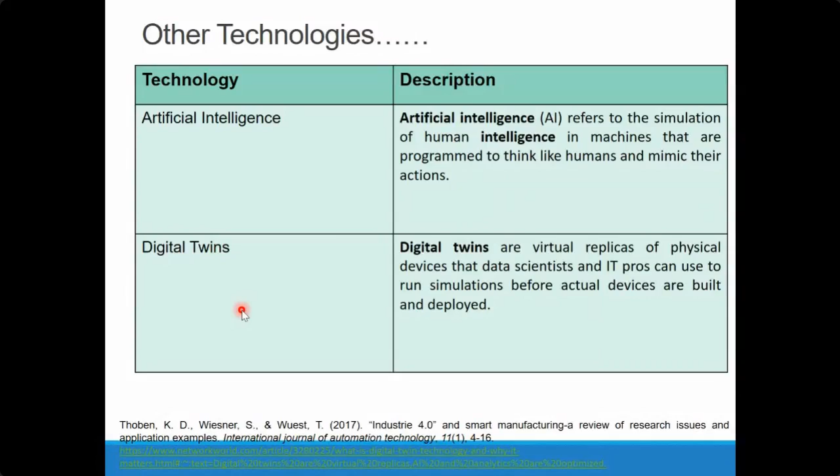Having discussed the technologies, if we see some of the enabling technologies for a smart factory, we could very well see communication technologies like embedded systems, positioning technologies, sensor-based technologies and applications and other aspects, how they are being connected with the machineries, and the coordination, how we may have to bring about, in order to enhance manufacturing performance.

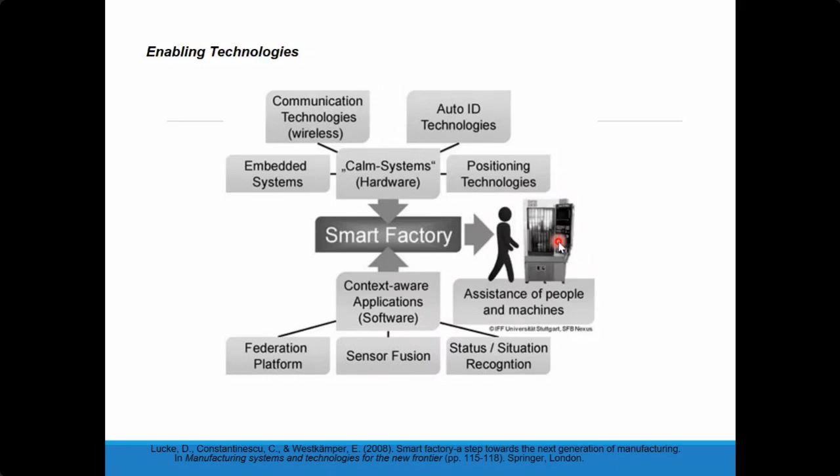If we see the challenges of smart factory, here some identification-related challenges we have, like status updates, and resolving queries, and we may have information on a heterogeneous perspective, how it has to be integrated and so on.

Next, if you see the smart factory, it has different aspects, like we have physical resources, we have industrial networks, and we have cloud systems, and we have supervisory and control aspects, how they are being connected together.

The communication protocols are also very essential as a part of it, because we have different communication protocols based on IEEE, ZigBee, and a variety of protocols. Those protocols are very essential for the smart factory coordination between the various activities in a smart factory.

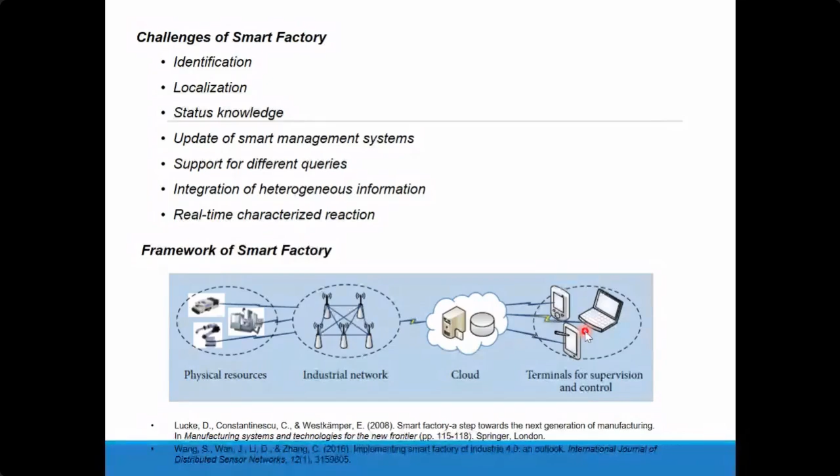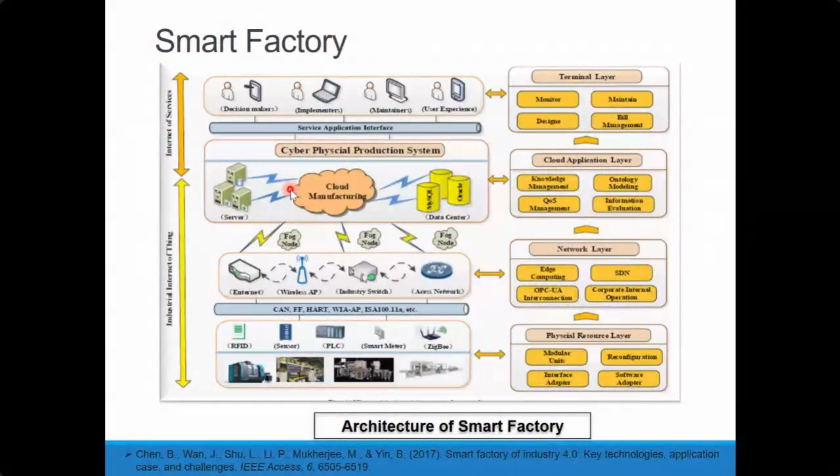This kind of architecture will help the execution of the smart factory operations, because there are several challenges associated with the smart factory. These kinds of architectures will help us integrate the various layers and integrate several functions as a part of it. So it's more interesting to design and deploy these kinds of smart factories.

But the challenge comes when we try to incorporate these kinds of concepts for small and medium enterprises. Naturally, since it involves technology integration, how these technologies need to be deployed is challenging, and how we can bring about the integration of technologies.

Small scale industries may have to go for resource sharing, and they may have to create certain common facilities on a shared basis and so on. But definitely these concepts are relevant for small scale industries, and they may have to go ahead with these technologies as a part of it. But there are certain challenges.

With regard to job opportunities, generally smart manufacturing creates more opportunities, because the thinking style is very essential, as product and process innovation has to happen, for which creative and innovative thinking is essential. Apart from that, thinking multiple concepts and bringing about the best concept from them, that decision making aspect is also very essential. And the learning potential, the learning aptitude among the workforce, is also very essential as a part of it.

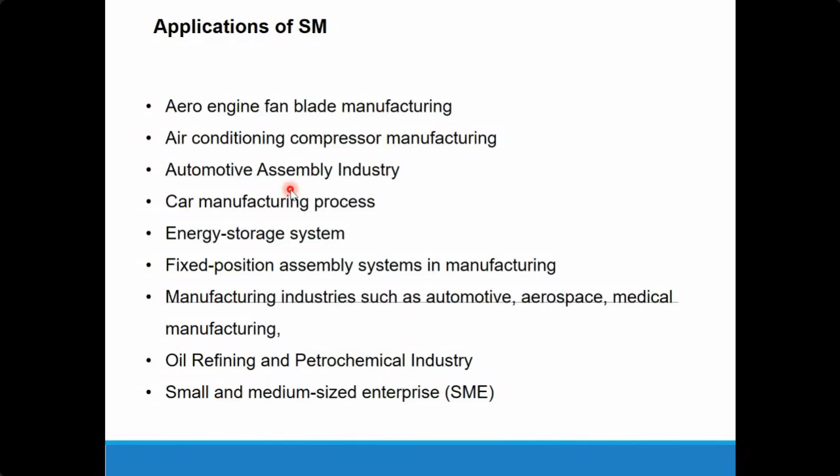Fine, this is from my side. In the presentation, we had the discussion about sustainable manufacturing, its relevance for additive manufacturing, and we discussed smart manufacturing, the concept of smart factory, and the role of additive manufacturing and 3D printing. So now let us devote time for the discussions.